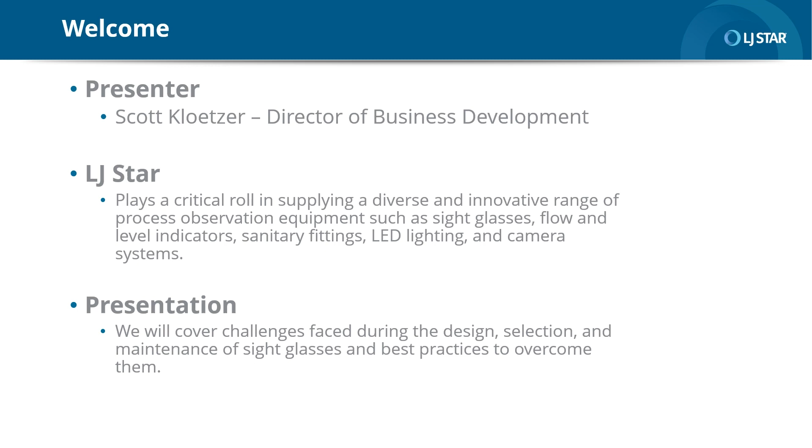I always like to start off most of my presentations by asking, why glass? That's basically what we're known for. So I'm going to try to get into some of the reasons why a customer would want to look at using glass in their applications. So optical clarity is one of the main reasons why glass. It's clear. You can see through it. It's why your house has windows made of glass so you can see through it. It's why your car has glass so you can see through it. It's going to basically enhance your ability to view the process safely and in process, which is very important.

The best example I can give for anybody that's not necessarily in a process type environment is if you're at home and your hot water heater isn't working properly, the first thing they tell you to look at if you've got a gas powered water heater is whether or not the pilot light is lit to make sure that it's functional. You would look underneath the hot water heater and you'd see a small clear glass or plastic covering that allows you to see in underneath the unit and verify whether or not the pilot light is lit. That is probably one of the easiest examples I can give you of why you want optical clarity, to be able to see but separate you away from what that process might be.

The other important thing is when you get into internal inspections, you've got possibly high pressure applications where you can't just open a process while it's actually functioning, because it could cause harm to the operator. So you may have a high pressure application. You may have high temperature applications, or even very, very cold applications that could cause harm to the operator, but they need to be able to see what's happening inside. And that's what glass does: it allows you to see inside without having to open a process.

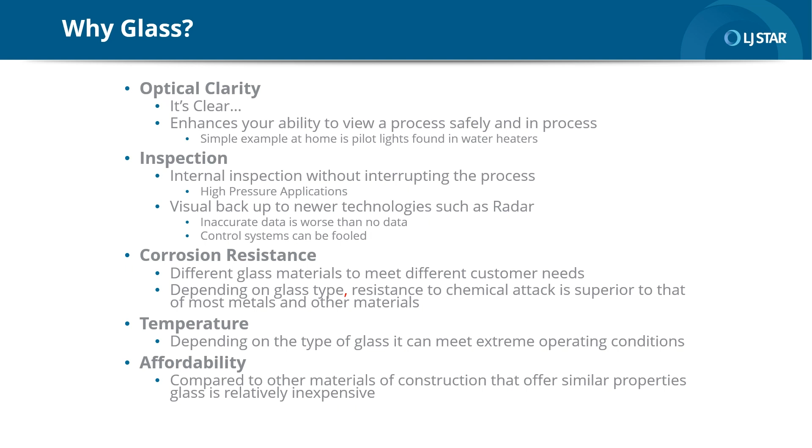In this next section, we're going to talk a little bit about some of the challenges that we see in sight glass selection, try to cover some of the questions that we get from some of our customers, some of the engineering firms that we work with, and try and work through some of those. Below, I've laid out some of the challenges that we face when helping our customers design a specific sight glass for their process. The first one that tends to come up is compatibility.

We want to make sure that whatever we're quoting is compatible with the process, and that can be everything from temperature to whether it's corrosion resistant to whatever it might be, but we want to make sure that all the product that we're putting together to form this one piece of equipment is compatible with the process media that the customer has.

Now, in this case of compatibility, we are not at liberty to give a recommendation on a specific material because we just don't know enough about our end users' process media to make that kind of determination. So we're going to have to rely on our customers to have an understanding of their process and help us determine what materials may work best. So if they say a 316 stainless steel is acceptable and this particular gasket material, then we can go about designing the sight glass around those requirements.

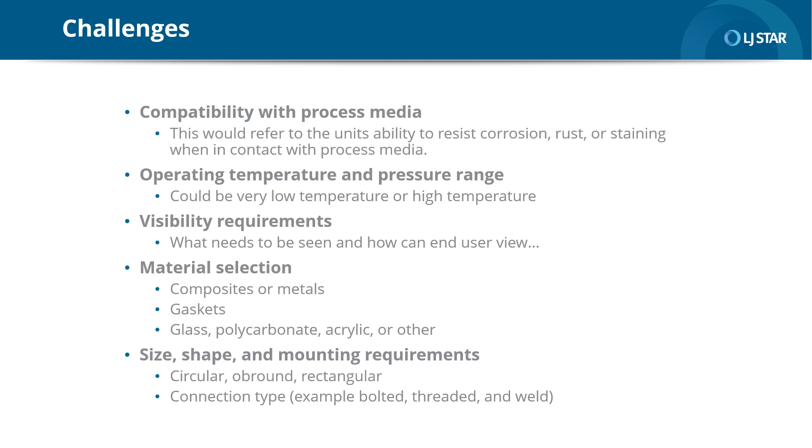And then again, we look at, what's the size, what's the shape, how is it mounting? We want to go through some of those requirements and determine what type of a connection, whether it's bolted, threaded, or welded, and are we looking at a circular or an obround or a rectangular, or is it a level gauge that comes off the side of the tank and isn't even mounted to the tank other than just through some connections and some valves? There's a lot that we have to go through to determine what's the best fit for our customer.

Now, based on some of the challenges that we just talked about, those are all the things that we'd really like to have figured out. But in many cases, our customers don't always know. They may be at the start of a project and they're trying to get some pricing and determine what is going to be required with regards to their Sightglass and what can we do for them. So what we like to go back to our customer and say is, look, for us to be able to tell you what we recommend or what may work in your application and give you some sort of a budget price or a standard price, we're going to have minimum design requirements that have to be met.

So when you come to us for a quote, we have to know these key items that I've got listed here. So we need to know, what are you trying to view? What's important to the operator? What do they want to see? Are they trying to see level? Is it flow? Is it foaming? Is it color? Is it particulates? What are they looking for? What are they trying to view? So we know if a light is required, so that we know if all we're looking for is level. Is it flow? So there's different styles of Sightglass for each of these applications. We love to have this information. We could probably get by if you have just some sort of an idea. It doesn't have to be perfect.

But what we do need to know for sure is, what type of mounting or connection type are you looking at? Because we can't price it if we don't know, because there's so many different types of mounting and connection types. Is it going to be welded? Because there's a different process if it's welded. Is it going to be bolted? Because we've got to match whether it's a 150-pound raised face. Is it a 300-pound raised face? We've got to know what type of mounting and connection type you're looking at having used with this particular application.

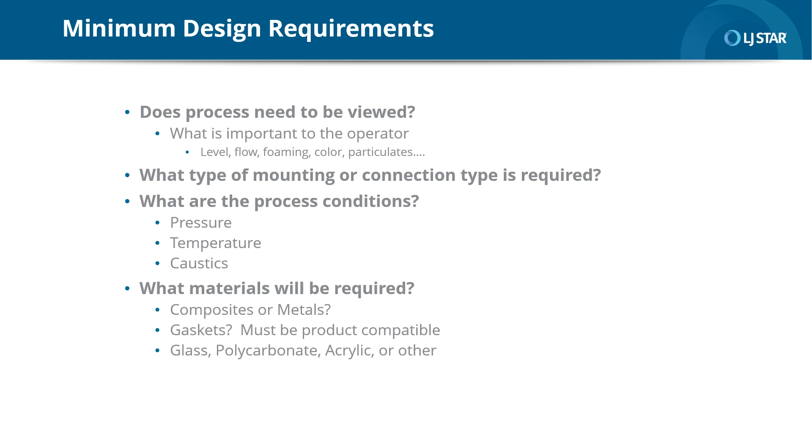This next section is going to be kind of a piggyback on the previous, where I'm going to get a little bit more into the material types and connection styles, just to give you an idea as to what we're able to do. So there are a significant number of connection styles. I probably can't even name most of them, and new ones are popping up all the time. But they can vary by industry and application requirements.

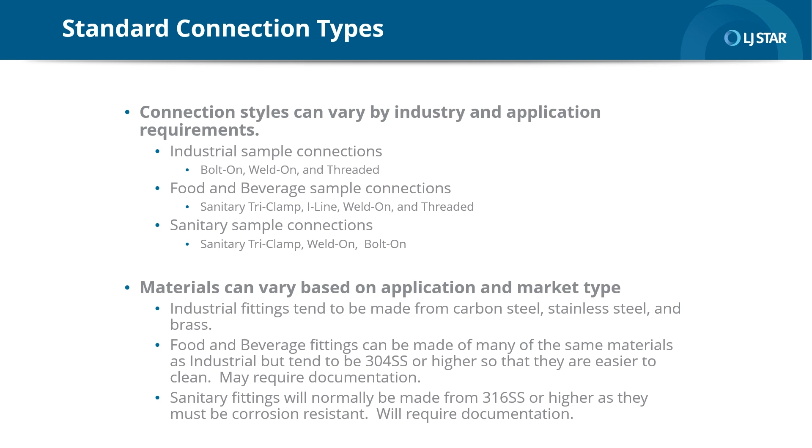So most people tend to be familiar with the different metals and the different gaskets, but I'm going to talk a little bit about the standard glass and try to help you understand a little bit more about probably the most important product that we sell, because that's what you want to see through, and that's the glass. So we have to try to make our products compatible with our end users, and there's different grades of glass that can be used for each of those different applications.

So to start off, we start with Boro Plus, which is kind of that entry-level glass. It's similar to soda lime, but for example, it's less resistant to thermal shock. It leaches a little bit more when you start to get into a process that might be a little bit more corrosive, which is not what you want to happen. So the Boro Plus is kind of that entry-level glass.

Then we go from Boro to soda lime, which is probably the most common glass that everyone is aware of for non-processing, which would be like 90% of glass manufactured. When I say non-processing, it might be used for glass in your car, glass in the windows in your house. It might be the glass used in the Sprite bottle that you had at dinner the other night. It's also extremely recyclable, so it's relatively inexpensive. That's why it's easy to manufacture. It's a very common material, and it can be recycled. So you see a lot of soda lime in and around the marketplace.

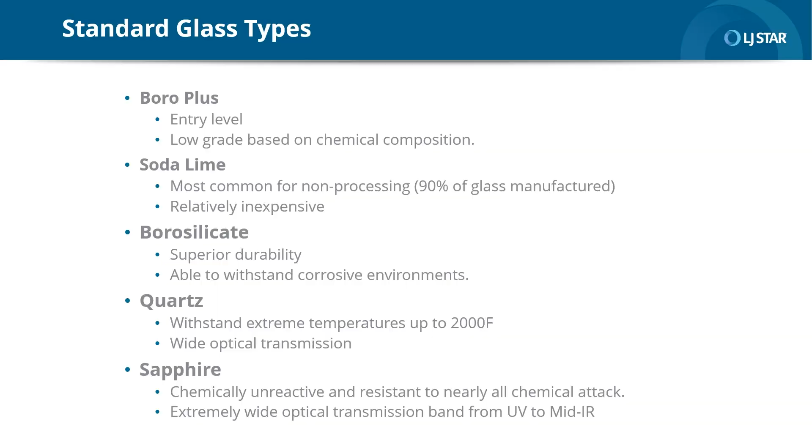In this next section, we're going to look at some of the challenges in sight glass inspection and maintenance, which are extremely important and not talked about enough. These are some of the challenges we've seen over the years working with our customers. Some of the main ones would be misalignment and installation errors. We run into this quite often because you're trying to put the unit together and you've got your base, your gasket, your glass, your cushion, your cover. Everything has to fit and go together properly.

So if you have any type of misalignment or installation issues, you could see leaking at the connection. You can damage the glass or the gaskets when you put them in. You can have gasket intrusion. So misalignment is extremely important, and it needs to be taken seriously when installing a lot of the sight glasses.

The other thing is corrosion, having customers not understand their materials. As I mentioned, we can't make recommendations with regards to what materials a customer should use because we're not familiar with the process. So we always recommend that our customers do a little bit of research and make sure that the materials they're requesting can handle the actual application or media, so you don't have these corrosion issues. With corrosion, you can have it attacking the metal and leaking through, attacking the gasket, the glass; whatever material may not be suitable for that process is the one that could fail. So you have multiple failure points with a sight glass.

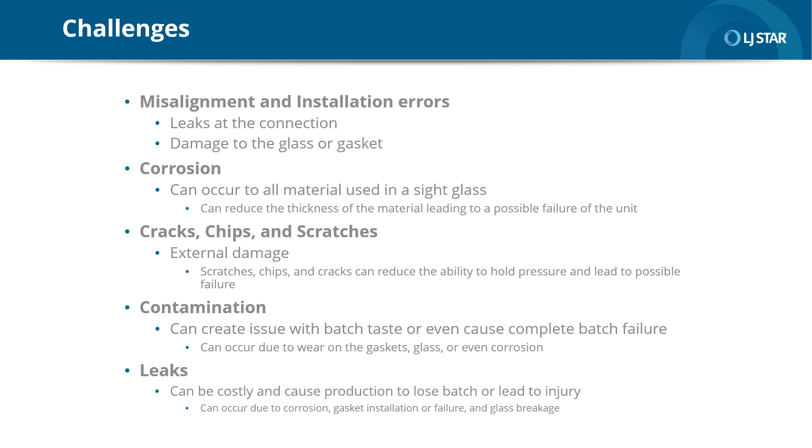Inspection and maintenance is extremely important and something that I really stress to our customers, because regular inspection and cleaning of the sight glass should be done to make sure that you can actually properly see the sight glass and that it's well maintained, and so you have some sort of an idea of what's happening over time.

I like to see an inspection and cleaning schedule. I know that not everyone does it, but I highly recommend, as does LJ Star, that you have a regular inspection period with regards to cleaning of the sight glass. Scheduled inspections are great to make sure that the glass is inspected for cracks, chips, scratches, whatever might be going wrong with it as far as imperfections.

It's something very simple where the user would go out, they would look at the glass, they would basically take a light and put it at an angle to see if there are any cracks or scratches, and that can happen quite easily with glass. It's not impervious to being hit. There's a lot of operators moving in and around where they may set tools on it, as I mentioned earlier, or they may bump a glass during production or during maintenance of other equipment. So it's something that really should be checked, especially since it can be broken.

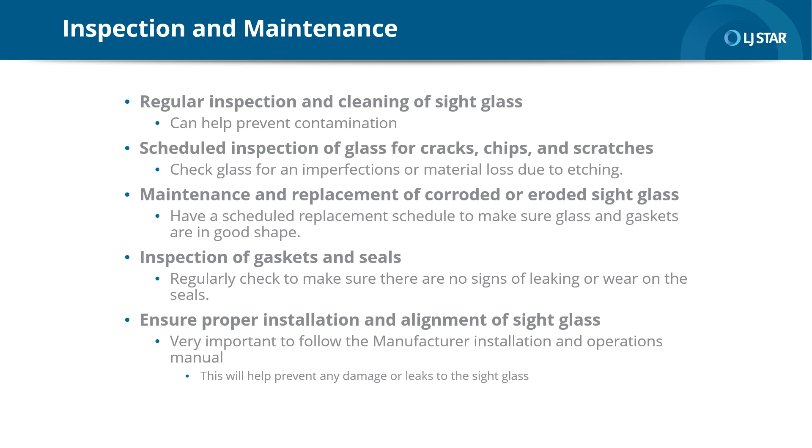So just to do a quick review of today's presentation, sight glasses play a very important role in being able to observe and inspect a process safely at a facility. As mentioned before, sight glasses can be used as a secondary source with a lot of the newer technologies, but sight glasses will allow the operator to see what is happening inside their equipment.

And I have found time and time again, they have saved a lot of time in understanding what may be occurring inside the tank and what may not be occurring as it should be inside those tanks. Also, I hope what we reviewed with regards to selecting the appropriate sight glass type, material, size, and shape made sense. If anyone has any questions about that, please feel free to ask at the end of this presentation.

Those are all very important when making sure that the sight glass we are offering you fits all the functionality and requirements you may have at the facility. So certainly I hope that some of those items to think about made sense, and that in the future, if you do need anything, we can work through those to get you what you need.

And I see this all the time, and LJ Star and I think this is extremely important: facilities really need to take inspection and maintenance seriously with regards to sight glasses. It's no different than the pumps or the valves or the piping or anything else you're inspecting at the facility. These inspections are necessary to make sure that you don't have leaks, that you're not contaminating any of your process, and that you're not going to have any failures of the unit itself, especially when it's under pressure or temperature or anything else that we discussed.